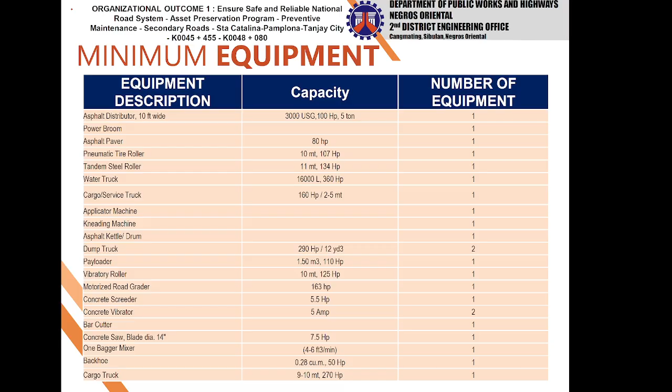This is the minimum equipment requirement: Asphalt distributor, 10 feet wide, 1 unit. Power broom, 1 unit. Asphalt paver, 1 unit. Pneumatic tire roller, 1 unit. Tandem steel roller, 1 unit. Water truck, 1 unit. Cargo service truck, 2 to 5 metric tons, 1 unit. Applicator machine, 1 unit. Kneading machine, 1 unit. Asphalt kettle or drum, 1 unit. Dump truck, 2 units. Payloader, 1 unit. Vibratory roller, 1 unit. Motorized road grader, 1 unit. Concrete screeder, 1 unit. Concrete vibrator, 2 units. Bar cutter, 1 unit. Concrete saw, 14-inch blade diameter, 1 unit. 1-bagger mixer, 1 unit. Backhoe, 1 unit. And cargo truck, 9 to 10 metric tons, 1 unit.

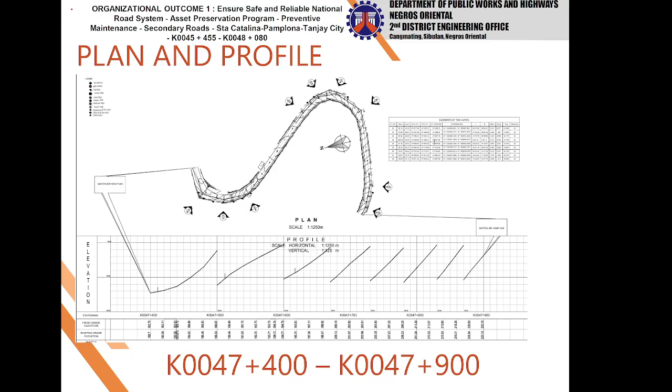K0046 plus 900 to K0047 plus 400. K0047 plus 400 to K0047 plus 900. And K0047 plus 900 to K0048 plus 080.

This is the cross-section for the project.

K0045 plus 455 to K0045 plus 471.22. K0045 plus 480 to K0045 plus 540. K0045 plus 560 to K0045 plus 600. K0045 plus 620 to K0045 plus 680.

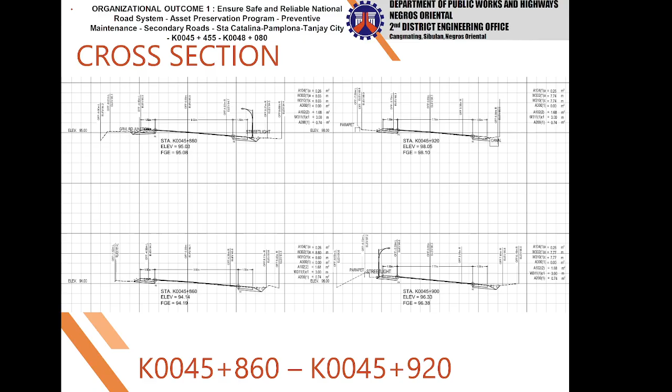K0045 plus 700 to K0045 plus 760. K0045 plus 780 to K0045 plus 840. K0045 plus 860 to K0045 plus 920. K0045 plus 940 to K0045 plus 999.95.

K0046 plus 020 to K0046 plus 080. K0046 plus 100 to K0046 plus 160. K0046 plus 188 to K0046 plus 240. K0046 plus 260 to K0046 plus 350. So the rest is somewhat similar like that.

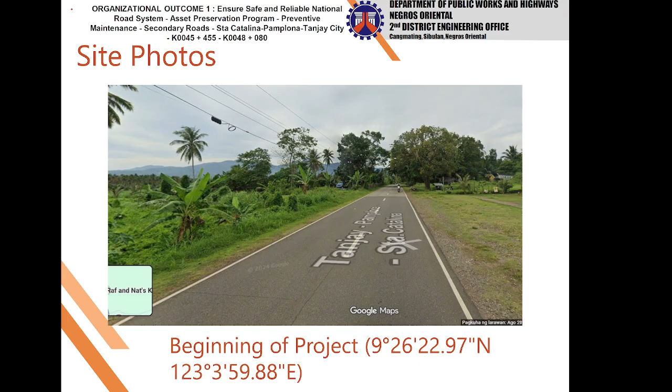Project site. This is the beginning of the project. Some site photos for the beginning of the project with its corresponding coordinates. And this sample site photo for the end of the project with its corresponding coordinates.

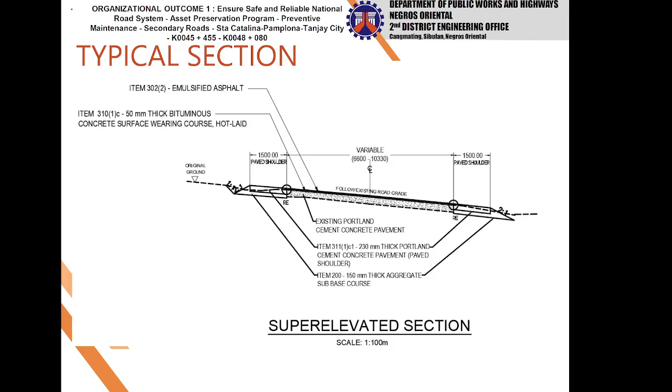This is the typical section for a super elevated section with existing paved shoulder on one side. Super elevated section. A typical section with roadside protection. There is also another typical section.

Itemized breakdown. Part A, facilities for the engineer. Construction of field office for the engineer, 1 lump sum. Provision of progress photographs, 7.07 months.

Part B, other general requirements. Project billboard signboard, 3 each. Occupational safety and health program, 1 lump sum. Traffic management, 7.07 months. Mobilization, demobilization, 1 lump sum.

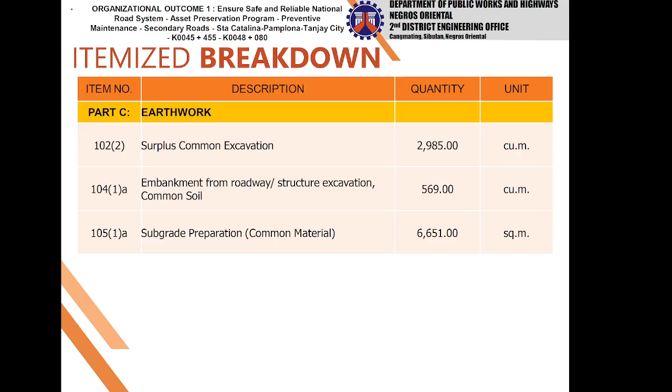Part C, earthwork. Surplus common excavation, 2,985 cubic meters. Embankment from roadway structure excavation common soil, 569 cubic meters. Subgrade preparation common material, 6,651 square meters. Part D, sub-base and base course.

Aggregate sub-base course, 1,624 cubic meters. Part E, surface courses. Emulsified asphalt, 20,909 square meters. Bituminous concrete surface wearing course, hot laid, 50 mm, 20,873 square meters. Portland cement concrete pavement unreinforced, 0.23 meter thickness, 14-day cure period, 6,651 square meters.

Part G, drainage and slope protection structures. Stone masonry, 119 cubic meters. Part H, miscellaneous structures. Metal guardrail, metal beam including post, single W beam, 24 linear meters.

Warning signs, 600 mm by 600 mm, W6-1 beam, pedestrian and school signs, pedestrian crossing ahead, 5 each. Warning signs, 750 mm by 750 mm, W6-1 beam, pedestrian and school signs, slow down pedestrian crossing ahead, 4 each. Hazard markers, 600 by 800 mm chevron signs, 12 each.

Reflectorized thermoplastic pavement markings, white, 624 square meters. Reflectorized thermoplastic pavement markings, yellow, 175 square meters. Concrete joint sealant, hot pour elastic type,

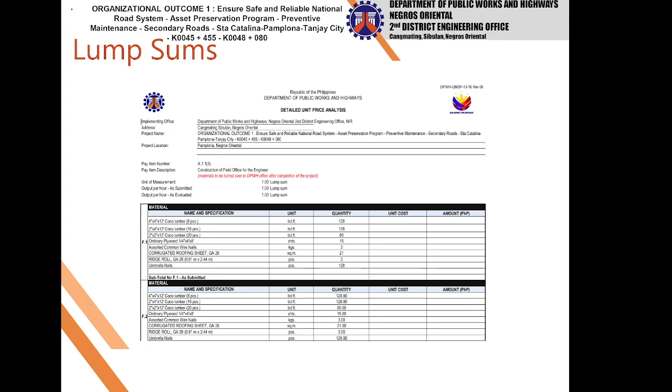1,522 kilograms. This is the lump sum for the construction of field office for the engineer, using coconut lumber, ordinary plywood 1/4 inch by 4 by 8 feet, assorted common wire nails, corrugated metal roofing sheets, ridge roll, and umbrella nails.

And this is also the lump sum for the occupational safety and health program, using safety helmet, safety shoes, safety vest, working gloves, rubber boots, and raincoats.

That's all for the project.

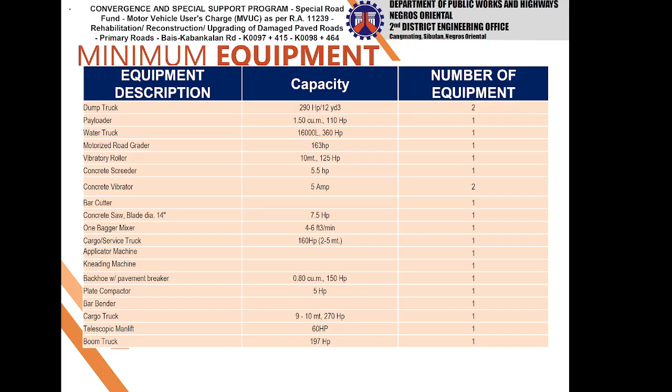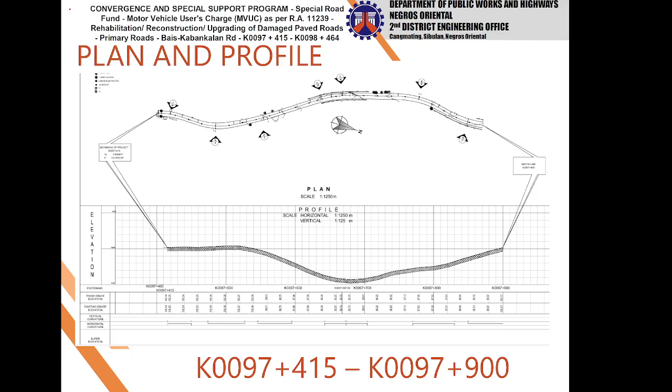This is the plan and profile for the project with its corresponding coordinates, K0097 plus 415 to K0097 plus 900, and K0097 plus 900 to K0098 plus 464.

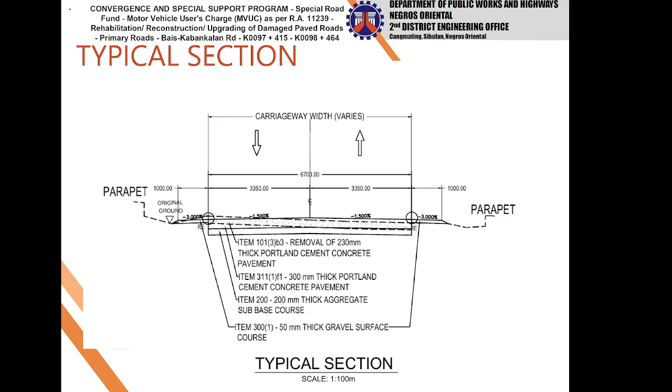The typical section of the project consists of removal of 230 mm thick Portland cement concrete pavement, installation of 300 mm thick Portland cement concrete pavement with 200 mm thick aggregate sub-base course, and a shoulder with 50 mm thick gravel surface course, 1 meter width. This is also another typical section.

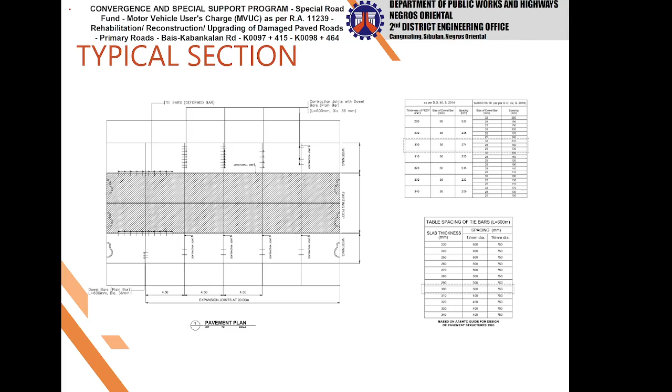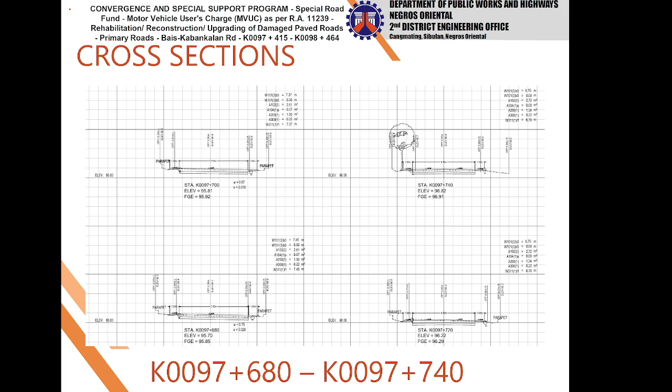K0097 plus 620 and K0097 plus 667.69, K0097 plus 680 to K0097 plus 740, and K0097 plus 760 to K0097 plus 820.

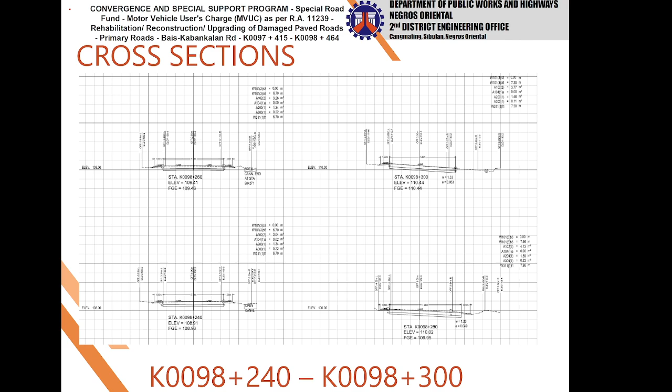K0098 plus 160 to K0098 plus 220, K0098 plus 240 to K0098 plus 300, and K0098 plus 320 to K0098 plus 380.

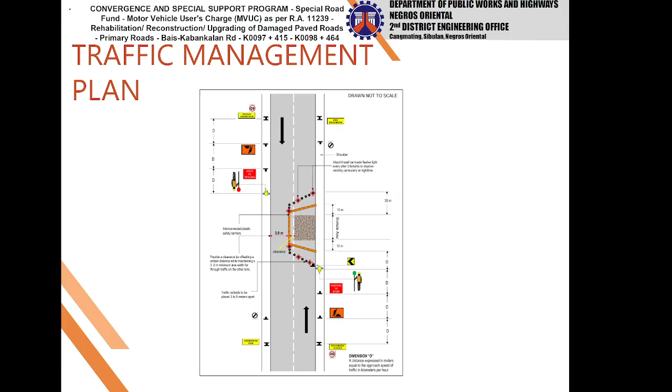This is the traffic management plan for the reconstruction.

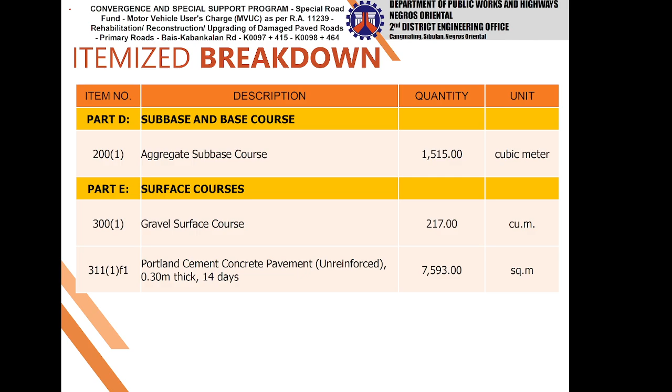Part F, bridge construction. Reinforcing steel, grade 40, 1,794 kilograms. Reinforcing steel, grade 60, 2,978 kilograms. Structural concrete, 20.68 megapascals Class A, 28 days, 65 cubic meters.

Part H, miscellaneous structures. Hazard markers, 600 by 800 mm chevron size, 23 each. Reflectorized pavement markings, white, 235 square meters. Reflectorized pavement markings, yellow, 81 square meters. Single arm roadway lighting, 10-meter pole, LED, 125 watts to 150 watts, 25 each.

This is also the lump sum for the construction of field office for the engineer, using coco lumber, ordinary plywood, assorted common wire nails, corrugated roofing sheet, ridge roll, and umbrella nails.

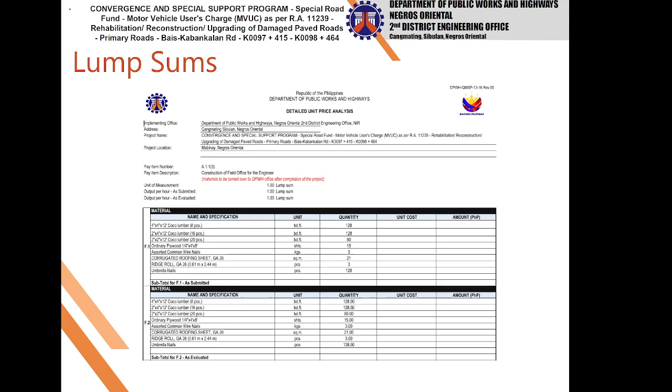This is also the occupational safety and health program, using safety helmet, safety shoes, safety vests, working gloves, rubber boots, and raincoats.

That is all for the project.

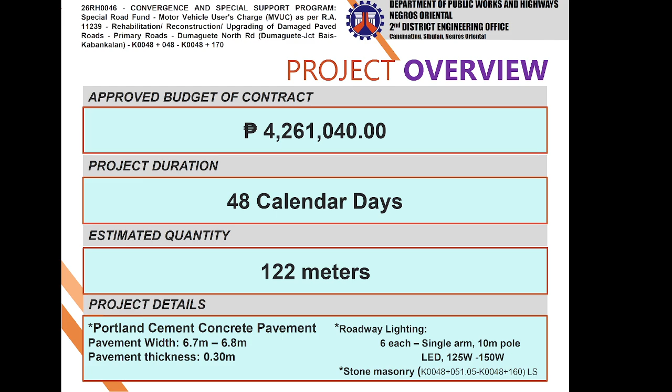For the project details, Portland cement concrete pavement, the pavement width is 6.7 meters to 6.8 meters, and the pavement thickness is 0.30 meters. There's also roadway lighting, 6 each, single arm, 10-meter pole, LED, 125 watts to 150 watts, and stone masonry from K0048 plus 051.05 to K0048 plus 160, lump sum.

For the minimum equipment: dump truck 2 units, payloader 1 unit, water truck 1 unit, motorized road grader with scarifier 1 unit, vibratory roller 1 unit, concrete screeder 1 unit, concrete vibrator 2 units, bar cutter 1 unit, concrete saw blade diameter 14 inches 1 unit, cargo or service truck 1 unit, applicator machine 1 unit, kneading machine 1 unit, backhoe with pavement breaker 1 unit, plate compactor 1 unit, bar bender 1 unit, cargo truck 1 unit, 1 bagger mixer 4 to 6 feet cube per minute 1 unit, telescopic manlift 1 unit, boom truck 1 unit.

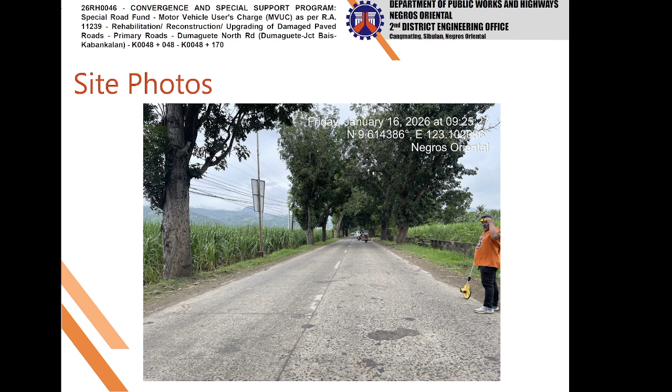Item 101-3C1, removal of existing 50 mm thick ACP. Item 101-3B2, removal of existing 200 mm thick PCCP. Item 311-1F1, 300 mm thick Portland cement concrete pavement. Item 200, 200 mm thick aggregate sub-base course. Item 300, 150 mm thick gravel surface course at the sides with a width of 1 meter.

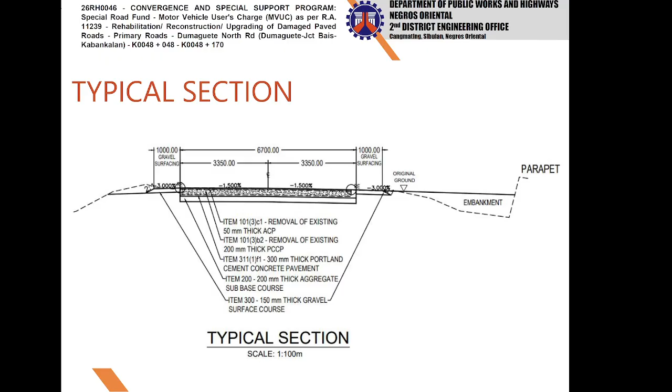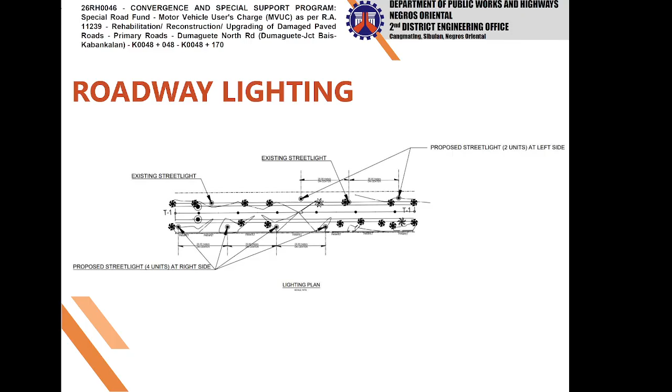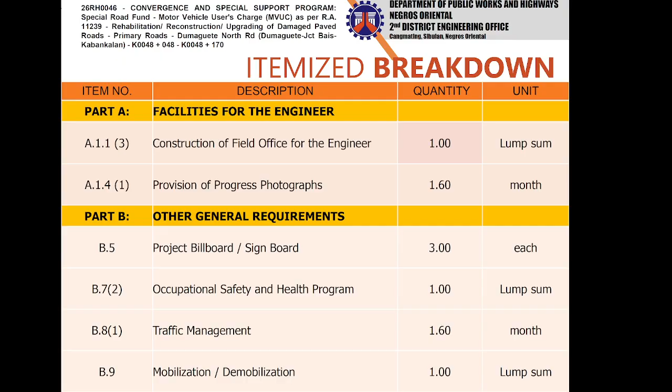Then the traffic management plan. For the itemized breakdown, facilities for the engineer: item A113, construction of field office for the engineer, 1 lump sum. Item A141, provision of progress photographs, 1.6 months. Item B5, project billboard or signboard, 3 each. Item B72, occupational safety and health program, 1 lump sum. Item B81, traffic management, 1.6 months. Item B9, mobilization or demobilization, 1 lump sum.

Then for the materials, for 1 lump sum of construction of field office for the engineer: 4x4x12 coco lumber, 128 board feet; 2x4x12 coco lumber, 128 board feet; 2x2x12 coco lumber, 80 board feet; ordinary plywood 1/4 by 4 by 8, 15 sheets; assorted common wire nails, 3 kilograms; corrugated roofing sheet GA 26, 21 square meters; ridge roll, 3 pieces; and umbrella nails, 128 pieces. Then the provision of progress photographs.

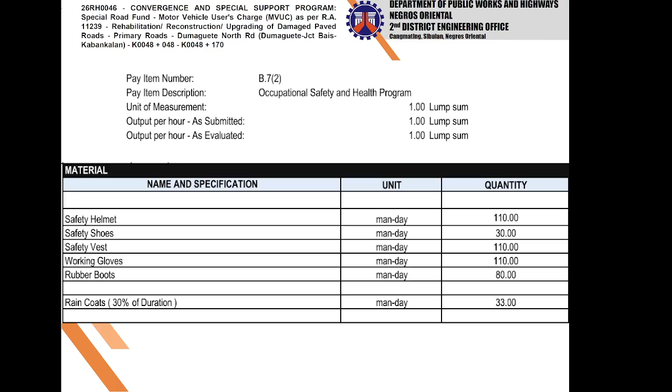Then the occupational safety and health program with 1 lump sum: safety helmet 110 man days, safety shoes 30 man days, safety vest 110 man days, working gloves 110 man days, rubber boots 80 man days, and raincoats 30% of duration, 33 man days. And this is a computation for the occupational safety and health program.

Then for the earthworks, item 101 3B2, removal of actual structures or obstruction, 0.20 meter thick PCCP unreinforced, 821 square meters. Item 101 3C1, removal of actual structures or obstruction, 0.05 meter thick ACP, 20 square meters. Item 1022, surplus common excavation, 16 cubic meters.

Item 1031A, structure excavation common soil, 29 cubic meters. Item 1033, foundation fill, 2 cubic meters. Item 1041A, embankment from roadway or structure excavation common soil, 251 cubic meters. Then item 1051A, subgrade preparation common material, 823 square meters.

Then for the subbase and base course, item 2001, aggregate subbase course, 165 cubic meters. Item 3001, gravel surface course, 41 cubic meters. Item 3111F1, Portland cement concrete pavement, unreinforced, 0.30 meter thick, 14 days, 823 square meters. Then item 4041A, reinforcing steel, grade 40, 308 kilograms. Item 4041B, reinforcing steel, grade 60, 511 kilograms. Item 4051A3, structural concrete 20.68 megapascal, class A, 28 days, 12 cubic meters.

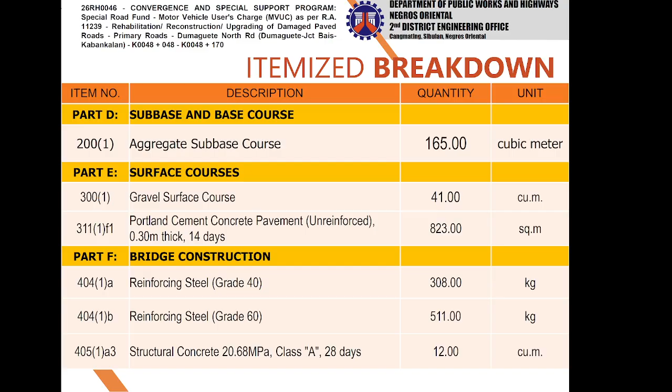This is for the pedestal of the street lights. Then item 5061, stone masonry, 39 cubic meters. Then item 6121, reflectorized thermoplastic pavement markings, white, 31 square meters. Then lastly, item 6241A3, single arm roadway lighting, 10-meter pole, LED, 125 watts to 150 watts, 6 each.

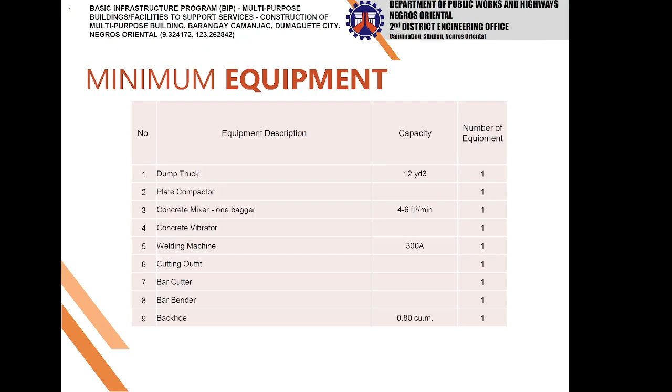Itemized breakdown: construction of field office for the engineer, 1 lump sum. Provision of progress photographs, 5.5 months. Permits and clearances, 1 lump sum. Project billboard signboard, 3 each. Occupational safety and health program, 1 lump sum. Mobilization demobilization, 1 lump sum.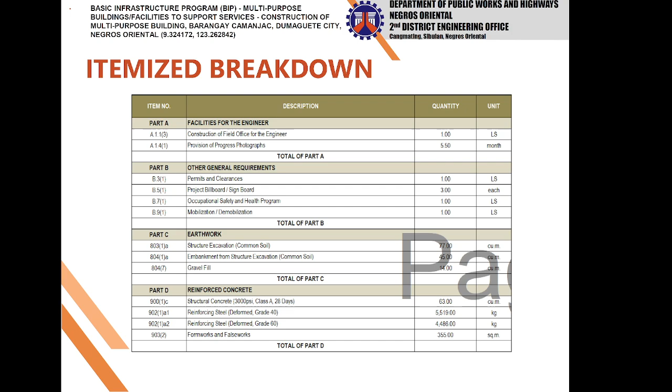Structure excavation common soil, 77 cubic meters. Embankment from structure excavation common soil, 45 cubic meters. Gravel fill, 14 cubic meters. Structural concrete 3000 PSI class A, 28 days, 63 cubic meters. Reinforcing steel deformed grade 40, 5,519 kilograms. Reinforcing steel deformed grade 60, 4,486 kilograms. Formworks and false works, 355 square meters.

Catch basin, 1 lump sum; sewer line works, 1 lump sum; storm drainage and downspout, 1 lump sum; septic vault tank concrete CHB, 1 lump sum. Plumbing fixtures, 1 lump sum. Cold water lines, 1 lump sum.

Ceiling, 4.5 mm fiber cement board on metal frame, 162 square meters. Carpentry and joinery works, 1 lump sum. Finishing hardware, 1 lump sum. Aluminum frame glass door sliding type, 4 square meters. Aluminum glass window sliding type, 11 square meters. Aluminum glass windows awning type, 2 square meters.

Aluminum glass windows, 1 lump sum. Wooden doors and windows, 1 lump sum. Fabricated metal roofing accessory, flashing, 29 linear meters. Fabricated metal roofing accessory, gutters, 13.2 linear meters. Pre-painted metal sheets above 0.427 mm rib type long span, 100 square meters. Glazed tiles and trims, 164 square meters. And glazed tiles, 11 square meters.

Cement plaster finish, 786 square meters. Painting works masonry concrete, 745 square meters. Painting works wood, 22 square meters. Painting work steel, 154 square meters. Reflective insulation, 100 square meters. CHB non-load bearing including reinforcing steel, 100 mm, 77 square meters, and CHB non-load bearing including reinforcing steel, 150 mm, 194 square meters.

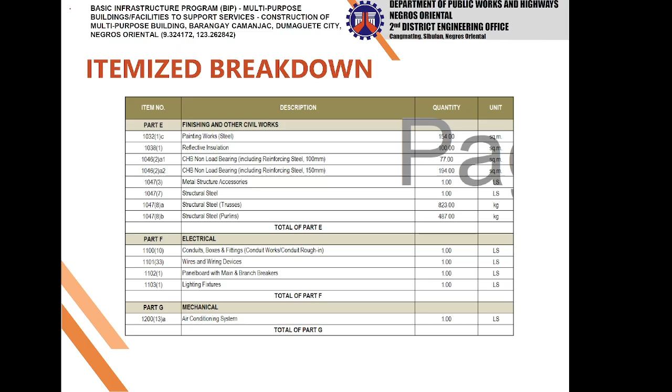So the scope of works: complete structural works, complete cement plaster finish, complete ceiling works, provision of reflective insulation on all ceiling works, complete steel works with paint including truss, purlins, rectangular tubes, square tubes, steel plates and bolts, complete GI sheet roofing including flashing and gutters, complete electrical works, rough-ins, lightings and fixtures, complete plumbing lines and fixtures, provision of all doors and windows, masonry painting works on all walls excluding back of firewall and all CR ceiling, provision of all railings, ramp, stairs, balcony, and provision of glazed tiles on all areas excluding entrance, stairs, balcony, and storage.

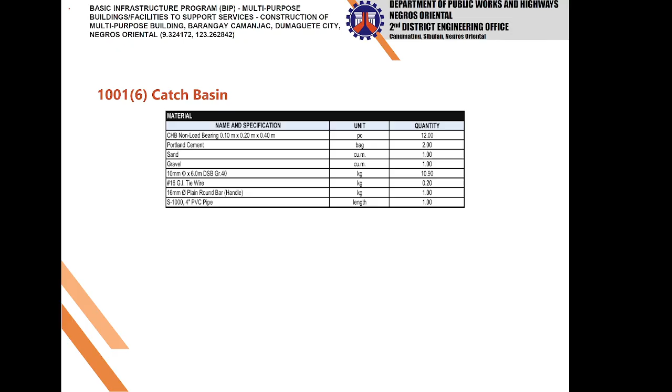For lump sum items, we have 1001(6) catch basin: CHB non-load bearing, 12 pieces; Portland cement, 2 bags; sand, 1 cubic meter; gravel, 1 cubic meter; 10 mm diameter bar, 10.9 kilograms; number 16 GI tie wire, 0.2 kilograms; 16 mm plain round bar, 1 kilogram; S-1000 4-inch PVC pipe, 1 length.

Sewer line works: 4-inch PVC pipe, 9 length; PVC Y, 4-inch, 3 pieces; PVC elbow 45 degrees, 4-inch, 11 pieces; 4-inch PVC elbow 90 degrees, 2 pieces.

2-inch PVC pipe, 19 length; 2-inch PVC Y, 15 pieces; 2x4 PVC Y reducer, 2 pieces; 1 1/4 by 2 PVC elbow reducer, 7 pieces; 2-inch PVC elbow 45 degrees, 24 pieces; 2-inch PVC elbow 90 degrees, 11 pieces; 2-inch PVC P-trap, 2 pieces; 2-inch PVC clean out, 2 pieces; solvent cement, 4 cans.

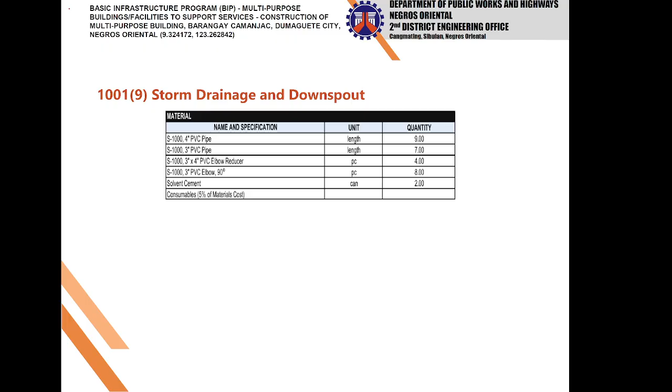Storm drainage and downspout: 4-inch PVC pipe, 9 length; 3-inch PVC pipe, 7 length; 3x4 PVC elbow reducer, 4 pieces; 3-inch PVC elbow 90 degrees, 8 pieces; solvent cement, 2 cans.

Septic vault tank: CHB non-load bearing 0.10 by 0.2 by 0.40 meter, 295 pieces; Portland cement, 45 bags; sand, 3 cubic meters; gravel, 2 cubic meters; 10 mm diameter bar, 163.4 kilograms; number 16 GI tie wire, 1.8 kilograms; cementitious waterproofing, 25 bags; 4-inch PVC pipe, 1 length; 4-inch PVC T, 4 pieces; 4-inch PVC clean out, 4 pieces; solvent cement, 1 can.

Plumbing fixtures. Sanitary fixture set includes water closet elongated flush type, lavatory long pedestal complete manually operated, stainless steel soap holder, stainless steel tissue holder, complete with fittings and accessories, 4 sets.

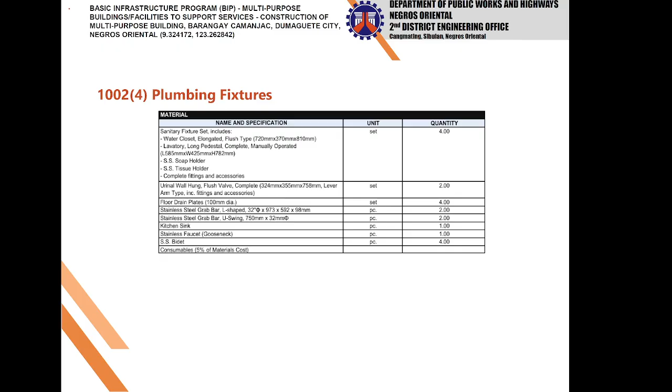Urinal wall hang flush valve complete with fittings and accessories, 2 sets. Floor drain plates, 4 sets. Stainless grab bar L shape, 2 pieces. Stainless steel grab bar U swing type, 2 pieces. Kitchen sink, 1 piece. Stainless faucet gooseneck, 1 piece. Stainless steel bidet, 4 pieces.

Cold water lines: PPR pipe 20 mm diameter, 15 length; PPR T 20 mm diameter, 10 pieces; PPR elbow 20 mm diameter, 19 pieces; PPR male adapter 20 mm diameter, 16 pieces; check valve, 1 piece; gate valve, 1 piece; cross valve, 4 pieces; water meter, 1 piece; solvent cement, 2 cans.

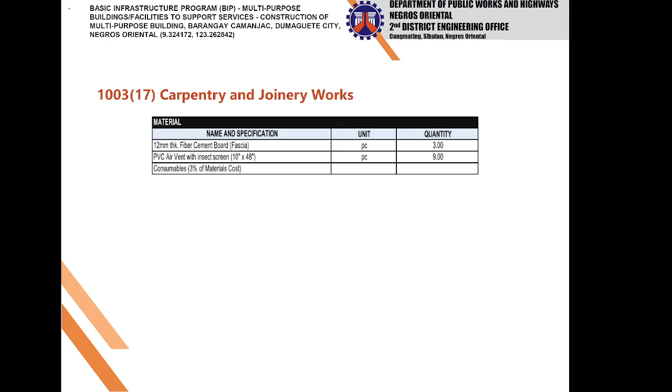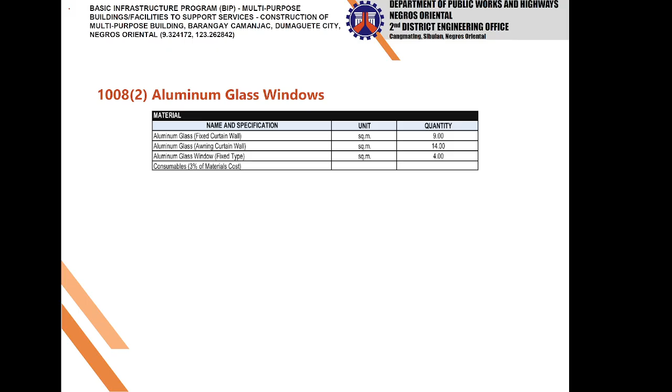Wooden doors and windows: wooden panel door 0.9 by 2.1 meters, 4 pieces; wooden panel door 0.8 by 2.1 meter, 1 piece; wooden panel door 0.7 by 2.1, 2 pieces; wooden jamb, 116 board feet.

Metal structure accessories: gusset plate 6 mm thick, 144 kilograms; steel plate 12 mm thick, 71 kilograms; angle plates, 24 kilograms; sag rod 12 mm diameter, 19 kilograms; cross bracing tension bar 12 mm diameter, 46 kilograms; turnbuckle 12 mm diameter, 12 pieces; anchor bolt 16 mm by 400 mm, 18 kilograms.

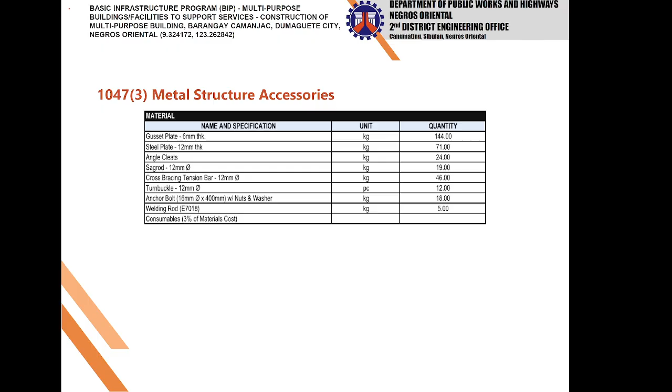Welding rod, 5 kilograms. Structural steel: 2 by 4 by 1.5 thick rectangular tube, 7 length; 3 by 2 by 1.5 mm thick rectangular tube, 1 length; 2 by 1 by 1.5 square tube, 5 length; 1 by 1 by 1.5 square tube, 3 length. Acetylene, 2.4 kilograms; oxygen, 4.8 kilograms; welding rod, 4.3 kilograms; stainless steel 1.5 inch, 5 length; welding rod for the stainless steel, 1 kilogram.

Conduits, boxes and fittings: service entrance cap, 1 piece; rigid steel conduit coupling, 4 pieces; rigid steel conduit, 2 lengths; PVC conduit 1/2, 160 length; PVC conduit elbow 90 degrees, 92 pieces; octagon junction box PVC, 58 pieces; utility box PVC, 27 pieces.

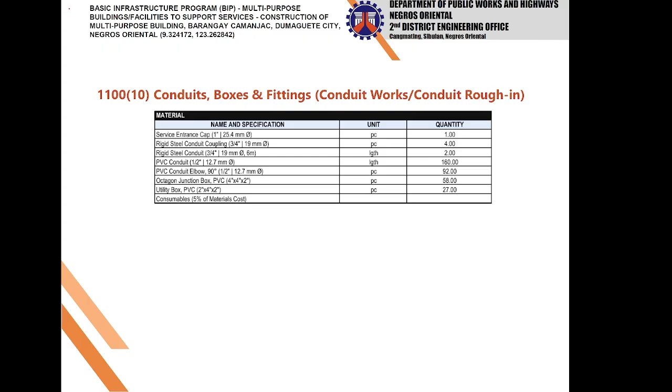Wires and wiring devices: electrical wire 14 mm diameter black, 12 meters; electrical wire 14 mm diameter white, 12 meters; electrical wire 3.5 mm diameter, 960 meters; switch 1 gang, 9 pieces; switch 2 gang, 2 pieces; universal outlet 2 gang, 16 pieces.

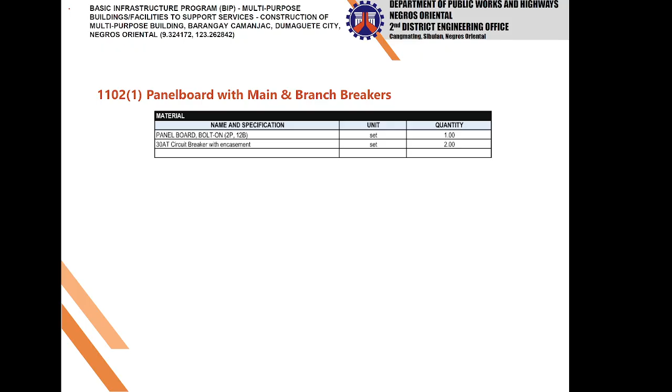Lighting fixtures: LED panel light 60 by 60 ceiling embedded 40 watts, 30 sets; 12 watts LED light downlights, round surface mounted, 12 sets; 10-inch exhaust fan, 4 sets. Air conditioning unit: 4 HP air conditioning unit with complete accessories including installation, 1 set.

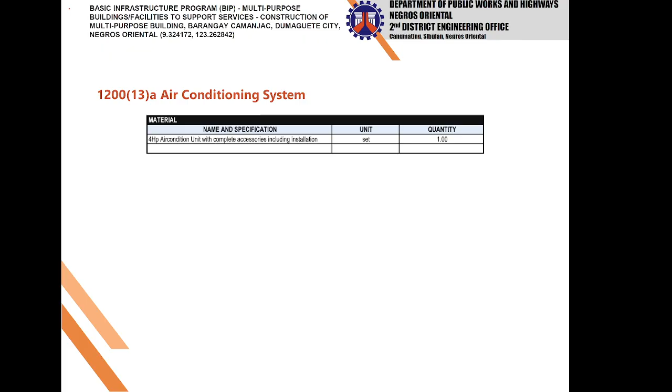Basic Infrastructure Program, Multipurpose Buildings, Facilities to Support Services. Construction of Multipurpose Building, Barangay Buñao, Dumaguete City, Negros Oriental. Please proceed.

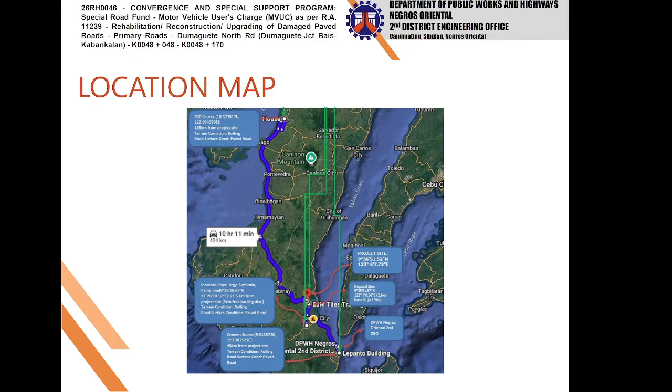So the next project is 26RH0048, Basic Infrastructure Program, Multipurpose Building Facilities to Support Services, Construction of Multipurpose Building, Barangay Buñao, Dumaguete City, Negros Oriental. Located at 9.328077, 123.294174. The approved budget of the contract is 4,950,000 with a project duration of 166 calendar days.

The minimum equipment required: dump truck, 1 unit; cutting outfit, 1 unit; jackhammer, 1 unit; plate compactor, 1 unit; concrete mixer 1 bagger, 1 unit; concrete vibrator, 1 unit; welding machine, 1 unit; bar cutter, 1 unit; bar bender, 1 unit.

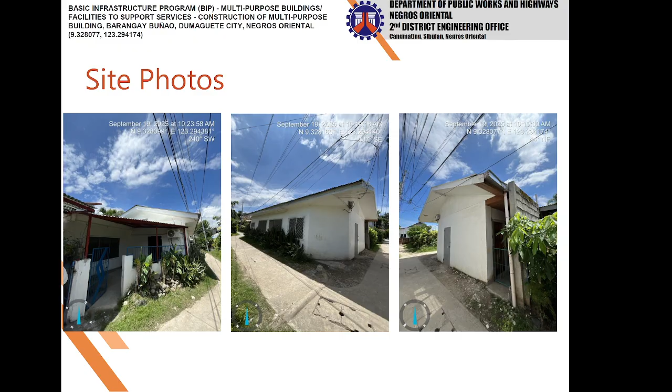This is the location of the project. Actual site photos.

Itemized breakdown: construction of field office for the engineer, 1 lump sum; provision of progress photographs, 5.53 month; permits and clearances, 1 lump sum; project billboard signboard, 3 each; occupational safety and health program, 1 lump sum; mobilization demobilization, 1 lump sum; removal of structures and obstruction, 1 lump sum.

Structure excavation common soil, 56 cubic meter; embankment from structure excavation common soil, 15 cubic meter; gravel fill, 15 cubic meter; structural concrete 3000 PSI class A 28 days, 71 cubic meter; reinforcing steel deformed grade 40, 5,199 kilograms; reinforcing steel deformed grade 60, 4,866 kilograms; formworks and false works, 340 square meter.

Sewer line works, 1 lump sum; storm drainage and downspout, 1 lump sum; septic vault tank, 1 lump sum; plumbing fixtures, 1 lump sum; cold water lines, 1 lump sum.

Ceiling 4.5 mm fiber cement board and metal frame, 170 square meter; carpentry and joinery works, 1 lump sum; finishing hardware, 1 lump sum; aluminum frame glass door sliding type, 3 square meters; aluminum glass window sliding type, 9 square meters.

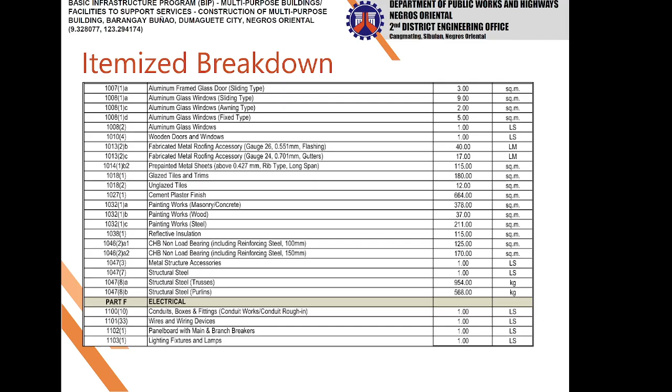Conduits, boxes and fittings, 1 lump sum; wires and wiring devices, 1 lump sum; panel board with main branch breaker, 1 lump sum; lighting fixtures and lamps, 1 lump sum.

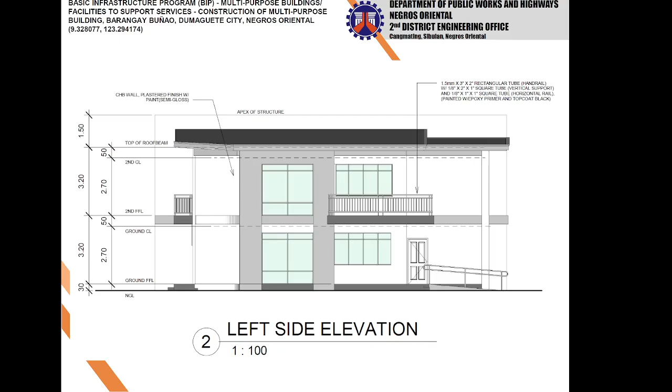Perspective view, front elevation, left elevation, rear elevation, and right elevation. So this is the ground floor plan. Second floor, roof plan.

Scope of works: complete structural works, complete cement plaster finish, complete ceiling works, provision of reflective insulation on all ceiling works, complete steel works with paint, truss purlins rectangular tube, square tube, steel plates and bolts, complete GI sheet roofing including ridge roll, flashing and gutter, complete electrical works, rough-ins, lightings and fixtures, complete plumbing lines and fixtures, provision of all doors and windows, masonry painting works on all walls excluding firewall and ceiling, provision of all railings, ramp, stairs, balcony.

Provision of glazed tiles on multipurpose area, all CR, and all daycare center, excluding pantry countertop, storage, balcony, stairs, and entrance.

For the lump sum items, you have sewer line works: PVC pipe 100 mm diameter, 9 lengths; PVC Y 100 mm diameter, 5 pieces; PVC elbow 100 mm diameter, 12 pieces; PVC Y reducer 100 by 50 mm, 2 pieces; PVC clean out with cover, 2 pieces; PVC clean out with cover 50 mm diameter, 1 piece; PVC pipe 50 mm diameter, 16 lengths; PVC Y 50 mm diameter, 14 pieces; PVC elbow 50 mm diameter, 45 degrees bend, 15 pieces; PVC elbow 50 mm diameter, 90 degrees bend, 13 pieces; PVC elbow reducer 50 by 32 mm, 7 pieces; PVC P-trap 50 mm diameter, 4 pieces; solvent cement, 3 cans.

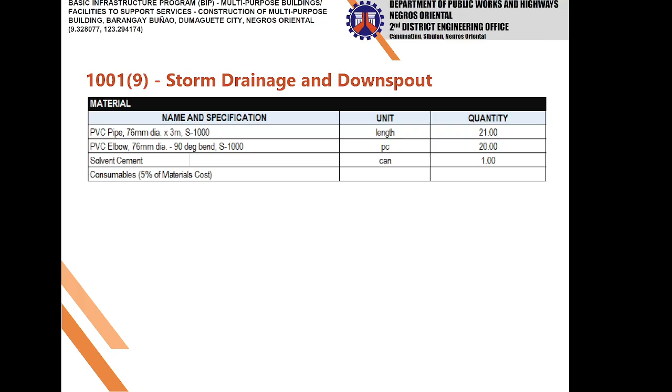Septic vault and tank: CHB 4 by 8 by 16, 316 pieces; 10 mm diameter reinforced steel bar, 87.6 kilograms; Portland cement, 47 bags; gravel G1 including bedding, 2 cubic meters; fine aggregates, 3 cubic meters; GI tie wire number 16, 1.4 kilograms; cement waterproofing compound including CR and second floor, 30 bags.

Plumbing fixtures: sanitary fixture set includes water closet elongated flush type, lavatory long pedestal complete manually operated, stainless steel soap holder, stainless steel tissue holder, complete fittings and accessories, 4 sets.

Urinal wall hung flush valve, complete lever arm type including fittings and accessories, 2 sets. Floor drain plates, 4 pieces. Stainless steel grab bar L-shape, 2 pieces.

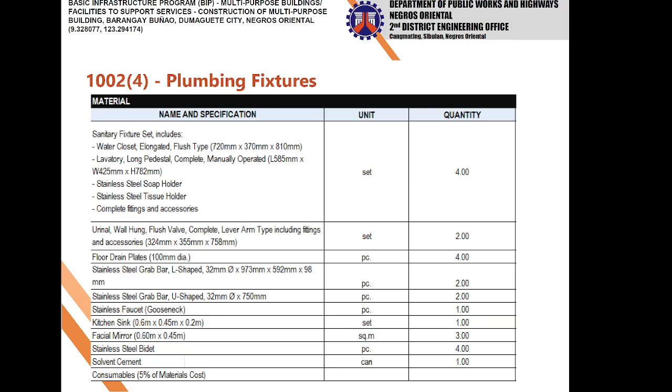Stainless steel grab bar U-shape, 2 pieces; stainless faucet gooseneck, 1 piece; kitchen sink, 1 set; facial mirror, 3 square meters; stainless steel bidet, 4 pieces; solvent cement, 1 can.

Cold water lines: PPR pipe 20 mm diameter, 12 lengths; PPR elbow 90 degrees, 18 pieces; PPR tee, 10 pieces; PPR male adapter, 6 pieces; PPR female adapter, 10 pieces; gate valve, 1 piece; check valve, 1 piece; angle valve, 6 pieces; cross valve, 4 pieces; water meter, 1 piece; solvent cement, 1 can.

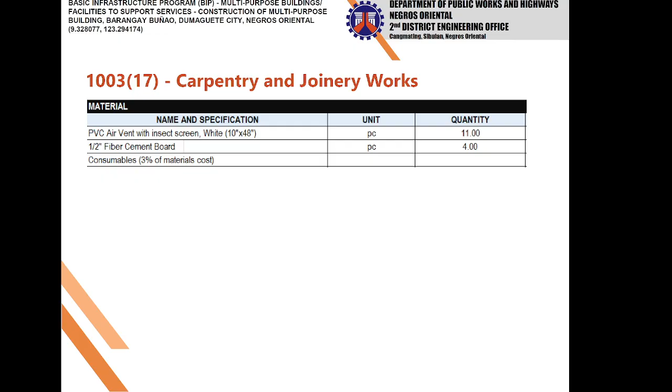Carpentry and joinery works: PVC air vent with insect screen, 11 pieces; 1/2 inch fiber cement board, 4 pieces.

Finishing hardware: lever type door lock, chrome finish, 9 pieces; 3.5 inch hinges, 27 pieces. Aluminum glass windows: fixed glass curtain wall, 18 square meters.

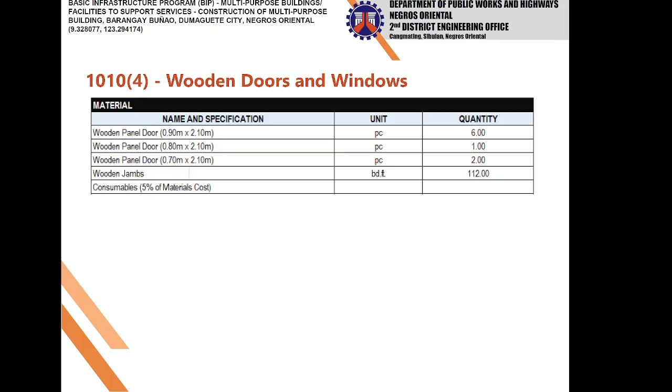Wooden doors and windows: wooden panel doors 0.9 meter by 2.1, 6 pieces; wooden panel door 0.8 by 2.1, 1 piece; wooden panel door 0.7 by 2.1, 2 pieces; wooden jambs, 112 board feet.

Metal structure accessories: gusset plate, 121 kilograms; steel plate, 94 kilograms; buckle plate, 61 kilograms; angle plate, 16.29 kilograms; sag rod 12 mm diameter, 20 kilograms; cross bracing tension bar 12 mm diameter, 41 kilograms; turnbuckle 12 mm diameter, 12 pieces; anchor bolt 16 by 200 mm, 40.38 kilograms; welding rod, 6 kilograms.

Structural steel: 2 by 3 by 1.5 rectangular tube, 4 lengths; 2 by 1 by 1.5 rectangular tube, 12 lengths; 1 by 1 by 1.5 square tube, 11 lengths; 1 by 1 by 3/16 angle bar, 187 kilograms; GI pipe schedule 40, 1 and a half by 38 mm diameter, 4 lengths; acetylene, 4.31 kilograms; oxygen, 8.63 kilograms; welding rod, 5.25 kilograms.

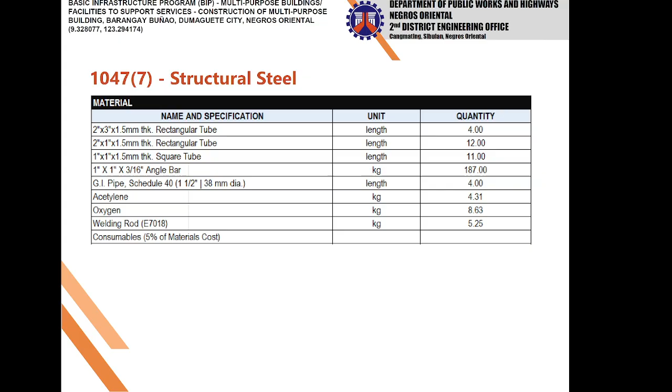Conduits, boxes and fittings: service entrance cap, 1 piece; rigid steel conduit coupling, 4 pieces; rigid steel conduit 3/4, 2 lengths; PVC conduit 1/2, 188 lengths; PVC conduit elbow 90 degrees 1/2, 82 pieces; octagon junction box PVC, 56 pieces; utility box PVC, 28 pieces.

Wires and wiring devices: electric wire 8 mm diameter black, 15 meters; electrical wire 8 mm diameter white, 15 meters; electric wire 3.5 mm diameter, 1125 meters.

Switch 1 gang, 8 pieces; switch 2 gang, 2 pieces; 3-way switch 1 gang, 2 pieces; duplex convenience outlet, 16 pieces. Panel board with main and branch breakers: panel board bolt-on 2P12B, 1 set.

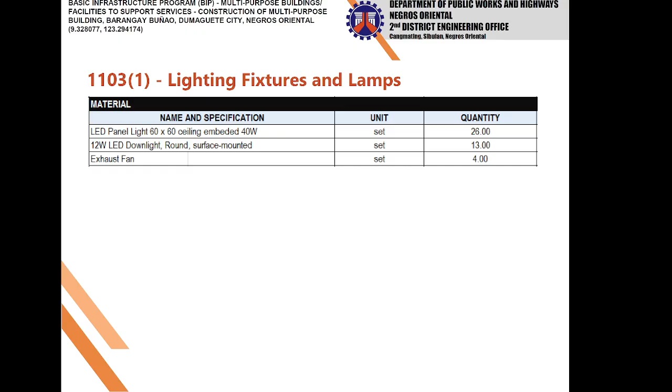Lighting fixtures and lamps: LED panel light 60 by 60, ceiling embedded, 40 watts, 26 sets; 12 watts LED downlight round surface mounted, 13 sets; exhaust fan, 4 sets.

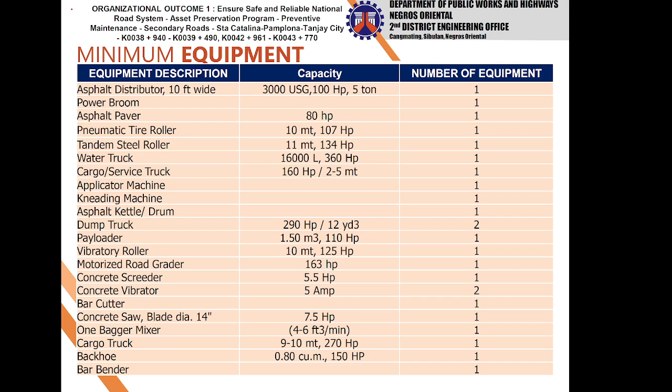Concrete screeder, 1 unit. Concrete vibrator, 2 units. Bar cutter, 1 unit. Concrete saw, 14-inch blade diameter, 1 unit. One bagger mixer, 1 unit. Cargo truck 9 metric tons, 1 unit. Backhoe, 1 unit. Bar bender, 1 unit.

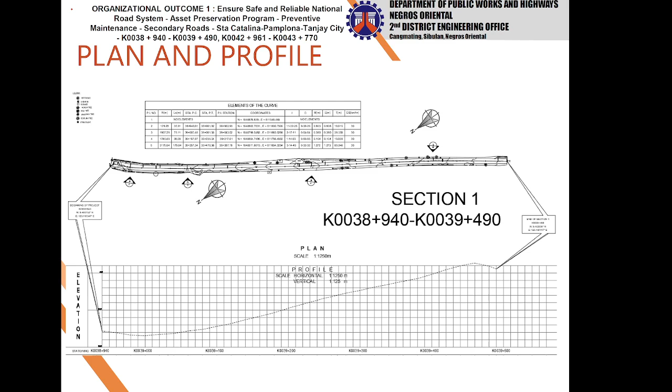This is the plan and profile for the project with its corresponding coordinates: Section 1, K0038 plus 940 to K0039 plus 490. Section 2, K0042 plus 961 to K0043 plus 770. Section 3, K0043 plus 400 to K0043 plus 770.

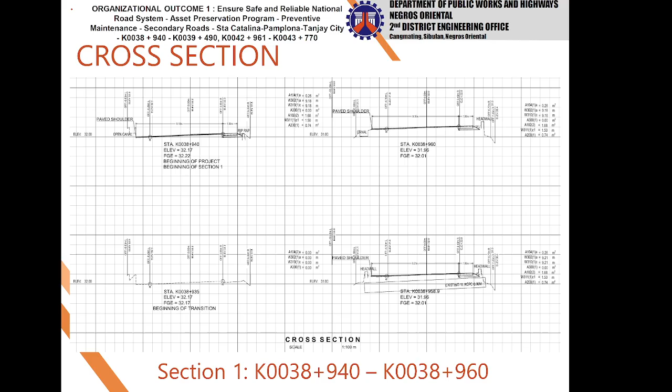Cross section, Section 1: K0038 plus 940 to K0038 plus 960. K0038 plus 980 to K0039 plus 000. K0039 plus 020 to K0039 plus 060. K0039 plus 080 to K0039 plus 120. K0039 plus 140 to K0039 plus 186.96.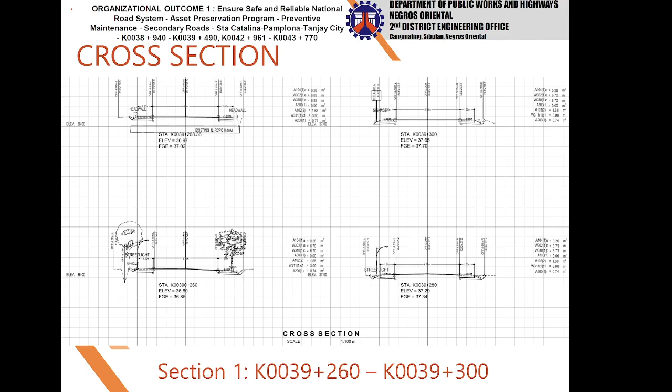K0039 plus 200 to K0039 plus 240. K0039 plus 260 to K0039 plus 300. K0039 plus 320 to K0039 plus 380. K0039 plus 400 to K0039 plus 460. K0039 plus 480 to K0039 plus 490. And that was the end of Section 1.

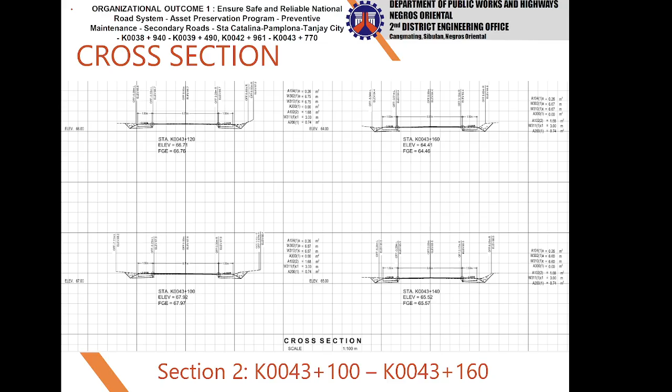K0043 plus 206.96 to K0043 plus 260. K0043 plus 280 to K0043 plus 340. K0043 plus 354.23 to K0043 plus 380.

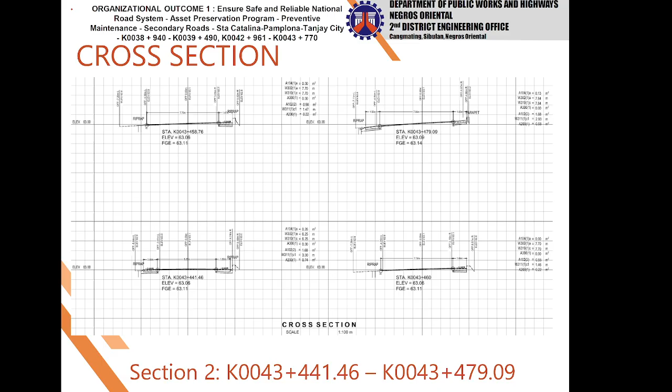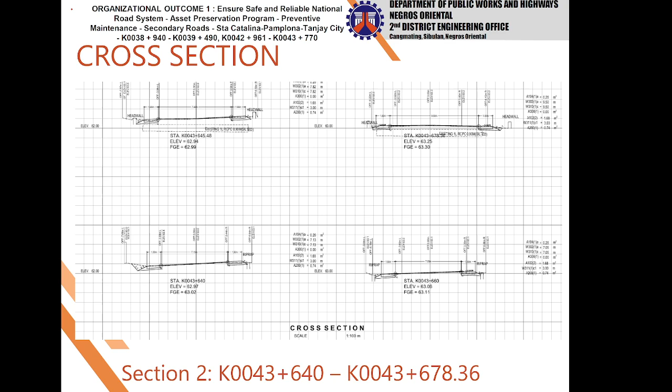K0043 plus 640 to K0043 plus 678.36. K0043 plus 680 to K0043 plus 701.1. K0043 plus 720 to K0043 plus 770. This is the end of Section 2.

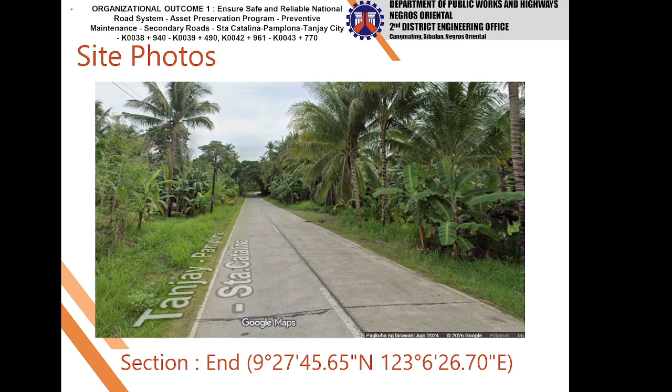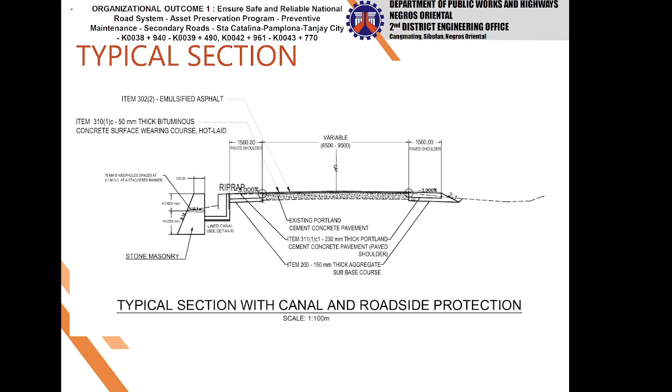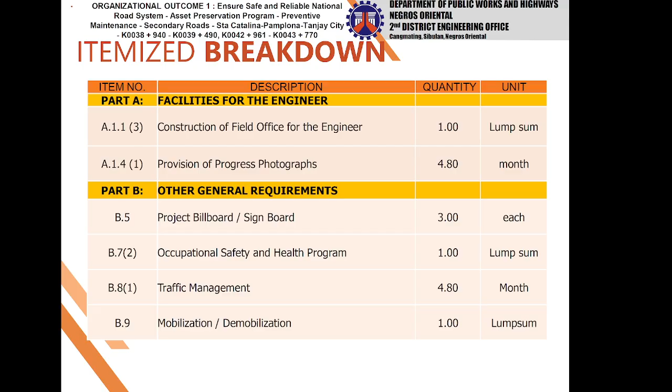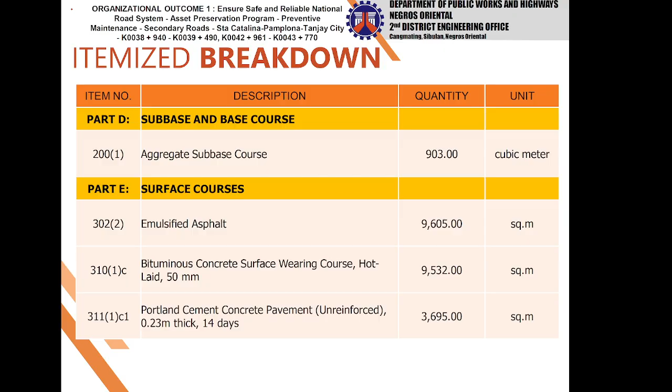Part H, Miscellaneous structures. Warning signs, 600 mm by 600 mm, W6-1B, pedestrian and school signs, pedestrian crossing ahead, 2 each. Warning signs, 450 mm by 750 mm, W6-1P, pedestrian and school signs, slow down, pedestrian crossing ahead, 2 each. Hazard markers, 600 by 800 mm, chevron signs, 2 each.

Reflectorized thermoplastic markings white, 336 square meters. Reflectorized thermoplastic markings yellow, 53 square meters. Concrete joint sealant, hot poured elastic type, 737 kilograms.